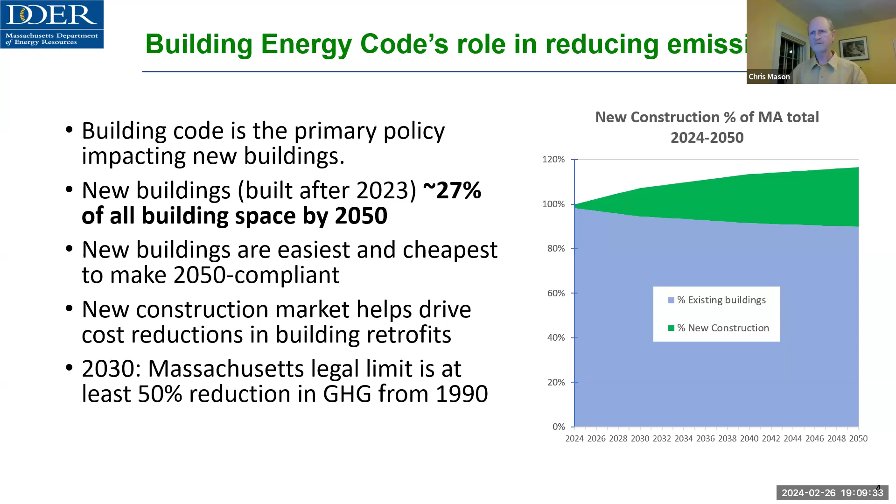On top of that, the stretch energy code, as it increases demand for things such as heat pumps, a rapidly changing technology, makes them more common and more available and more cost effective for even current homes that are going to adopt it. So there's a number of reasons to do this. The primary strategy that the state is using is shifting different kinds of fuels, whether it's transportation fuels or home fuels, from burning fossil fuels on site to an electric model.

And right now you can see that the most efficient way to burn fossil fuels on site is a gas stove, or gas furnace. And to produce 1 million BTUs of heat, it would produce 120 units of greenhouse gas emissions. So right now, with a cold climate electric heat pump, you would produce about 45% less climate emissions. You'd be down to 65. And if you actually got your heat from the ground using a heat pump, you're down to 45. And that's with today's electric grid.

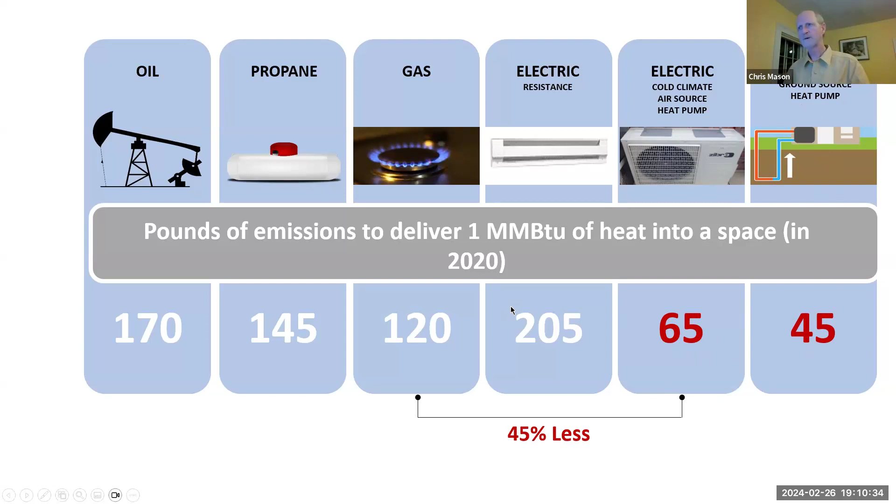So if we jumped to what we want to have happen by 2050, the electric grid, with the houses doing nothing else, their emissions would drop down to 18 units or 13 units with heat pumps. An 85% drop over burning fossil fuels in the house.

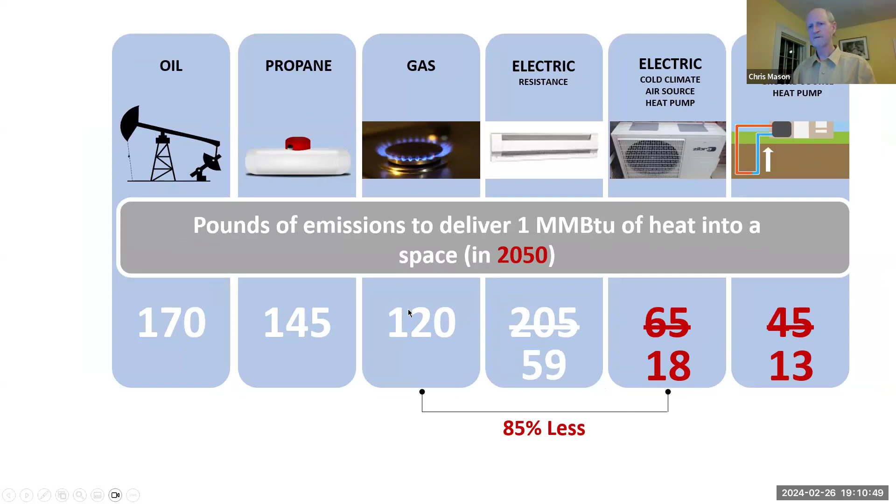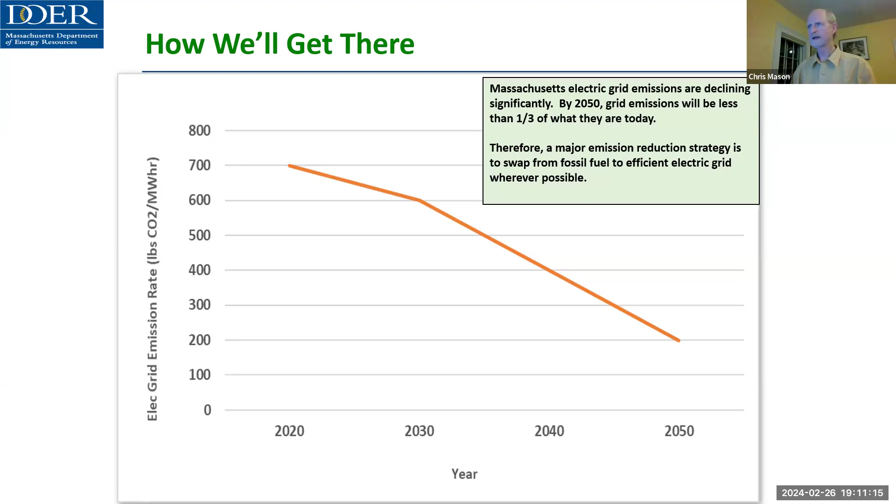So as we're electrifying our transportation systems and electrifying our heating and cooling systems in our houses, the state is working very hard to get our electric grid to be cleaner and cleaner, reduce the number of greenhouse gases coming out of it. There's a chart kind of showing what they're aiming for.

So right now, we're talking about the codes piece. There are 3 codes in Massachusetts, you could say. One is the base code. Everybody really is under the base code. But around 300 communities have adopted the stretch code. So they've got some energy efficiency measures that are above the base code. And then the specialized code, there's 31 communities that have already adopted that. And that's just a few more things that are added on top of the stretch code.

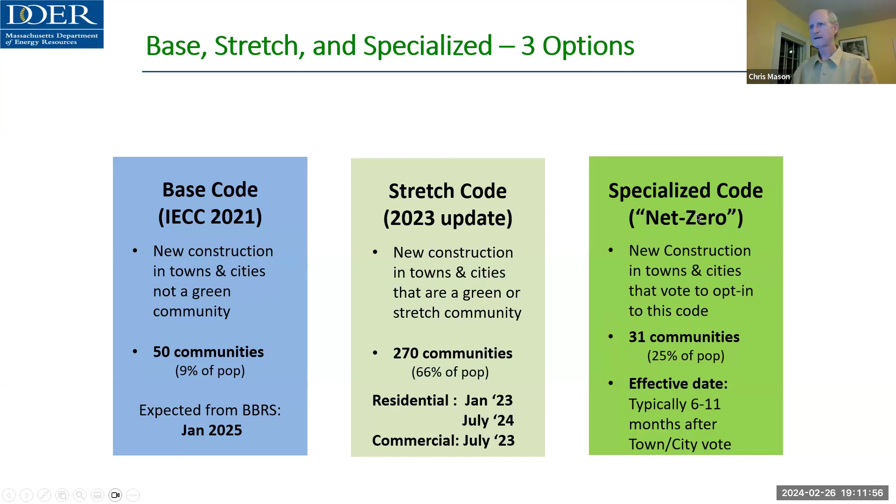Okay, stretch energy code is the current code in Shutesbury, and I'm going to pass this on to Mike Rossi to go over. Now, I want to stress that because a number of changes came out in relatively the same time frame, there's a lot of confusion out there over which code you're talking about, what you are actually living under right now, and what you might be able to vote on at a town meeting. We're going to try to really make that line distinct so you can see it.

So Mike Rossi is going to be talking about the current code. This is what you've already adopted. And then he's going to toss it back to me, and I'm going to go over the little changes that adopting the specialized code would have. We'll run it that way. So Michael. Yes, thanks so much, Chris. So as Chris mentioned, my name is Michael Rossi. I'm an energy code specialist with PSD.

And I want to preface it by saying, the way I like to think about the codes is that you have the base code, and then the stretch code is essentially the base code plus additional efficiency requirements. And then the specialized code is essentially the base code plus the stretch code plus a couple additional measures on top of that. So each of them build off each other. The stretch and the specialized code create a couple provisions that increase the efficiency of the provisions in the code.

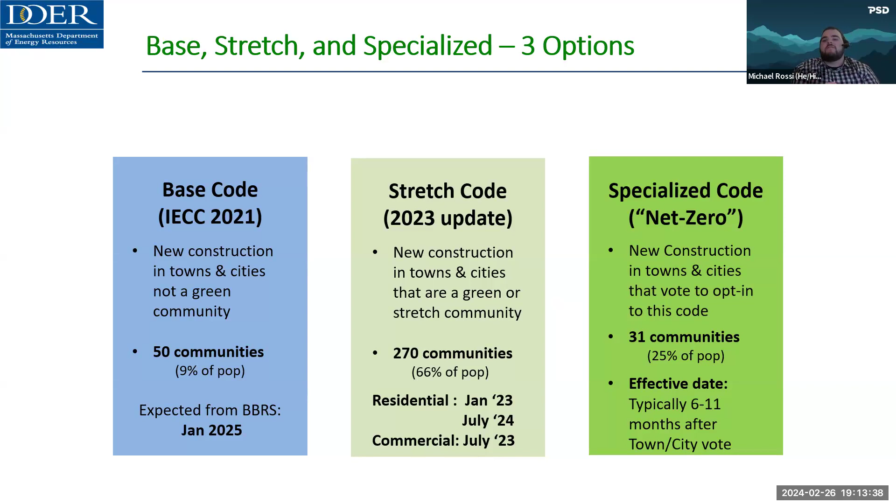So for a little bit of a timeline on what's happening right now with the stretch code. The stretch code in the state took effect for residential buildings on January 1st of 2023. The provisions for the commercial code took effect July 1st of 2023. The requirement initially provided in the residential code was a HERS index of 52, which we'll talk about in more detail in the coming slides. That requirement on July 1st of 2024 is going to be dropping significantly from a HERS 52 to a HERS 42 and 45. The next few slides will explain what that means.

On this timeline, I just want to say that the specialized code became available for adoption on January 1st of 2023 as well. So as of now, as Chris mentioned, 31 communities have adopted it. So it's been available for adoption for a little bit.

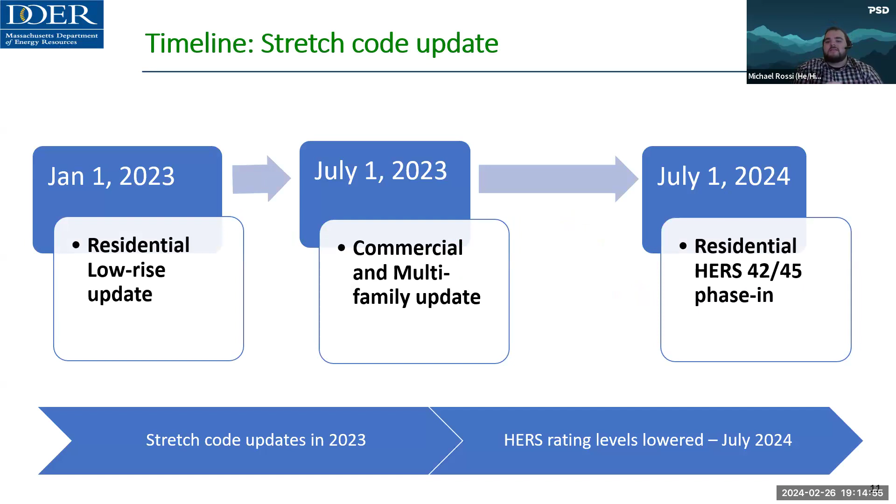All right, so first I'll talk a little bit about what HERS is and the HERS process. A HERS rating is a home energy rating system, which is essentially a third-party inspection that's certified through the Residential Energy Services Network, or RESNET. The way I like to describe a HERS rating is think of it like a miles per gallon sticker for a car, but for a house.

What it involves is preliminary modeling of a home based on plans. The HERS rater is hired by the builder or consultant or someone on site to do some inspections. So first, the builder provides the HERS rater with a set of plans and says, I'm going to build like this.

So the HERS rater takes those plans and builds a preliminary model. And that preliminary model is used to obtain a building permit at the beginning of the construction process. The intent is just to say, based on all of these features that were provided by our client, who's the builder, they say they're going to build with this type of water heater, this efficiency insulation, this level of efficiency, like mechanical equipment, ventilation. They sort of describe how they're going to build the home to the HERS rater, and the HERS rater puts together that preliminary thing that's used for the building permit.

But then part of that is also verifying that the information that was provided at the preliminary inspection was accurate. And what that requires is what's described as a midpoint inspection, where the rater will go in the field after insulation is installed, but before drywall is put on, to make sure that the insulation was installed correctly. And they have different models of how well the insulation is installed. They also collect features about different aspects of the home, like the efficiency of the windows, as I said, the mechanical equipment, the other features in the home. And there's a lot that goes into it.

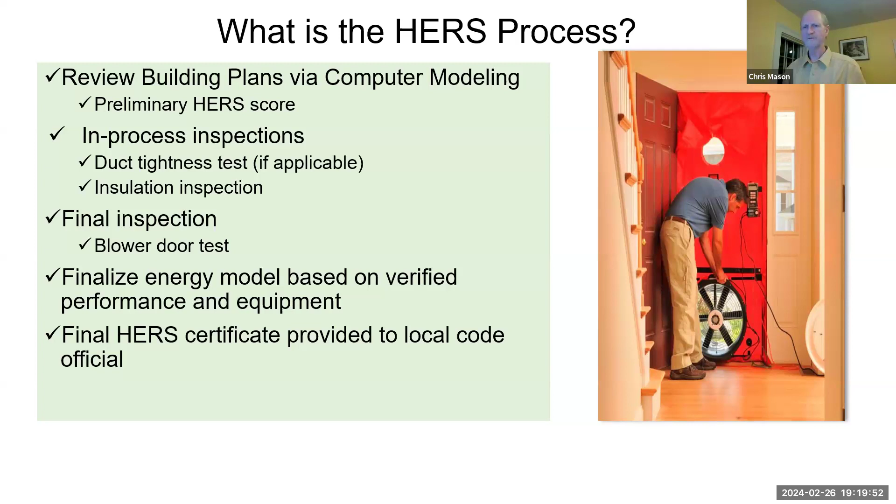And the reason I talk about the HERS process is because it's actually been embedded in the Massachusetts Code for a while now, I believe since 2008 when the stretch code was initially developed. And we'll talk more about what the scores mean in the next slide, I believe. Right. I just want to say, the point you were making at the end there was that not only is the house designed to be energy efficient, it's tested. Correct. So you know it's efficient. You got what you paid for. Yes, absolutely. So the rater is there to ensure that all of the features of the home are done accurately.

So now on the right here, we have that HERS index column, and that's sort of showing what the HERS score means. So the spec home is a HERS 100, and I should preface it by saying the lower the score, the more efficient. The HERS 100 is equivalent to a new home that was constructed in 2006, and the average HERS rating in Massachusetts in 2020 and 2021 was a HERS 51.

Most existing homes fall around the HERS 140 range, just because they're older. They're built prior to 2006, so they're going to have an increase in score. And a zero net energy home would be described as a HERS 0 or below. You could actually also have negative HERS indexes.

So essentially, the requirements of the code have steadily decreased over time. And by decreased, I mean the decrease in HERS rating index, but also increase in efficiency. In 2009, the code was a 65 for the stretch code or a 75 for the base code. In 2020, they were actually the same, with the base code and the stretch code both being a 55. In 2023, the base code stayed at a 55, but the stretch code requirement dropped to a 52, and the specialized code is a 42.

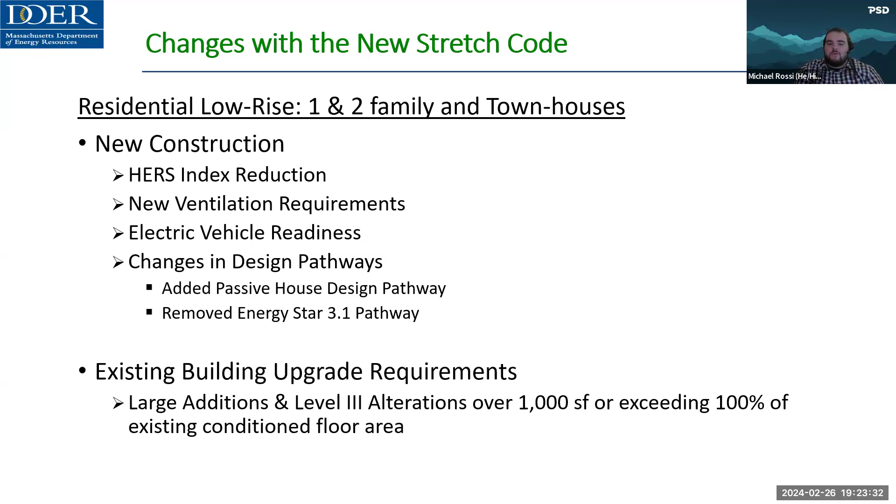And then additionally, there's also requirements for existing building upgrades, where large additions and level 3 alterations over 1,000 square feet or exceeding 100% of the total conditioned floor area also have to follow some of the requirements of the code.

All right, so as I said, I talked about this in a little bit more detail. In January of 2023, the requirement for the HERS index changed from a 55 to a 52. In July of 2024, that HERS index for the stretch code is going to drop to a 45 if the home's all electric, or a 42 if you're using mixed fuels, so if any combustion equipment is used in the home for heating, cooling, water heating, or cooking. There's also EV ready wiring requirements that I discussed, which is one 240 volt, 50 amp circuit per home. And then we talked about the ventilation requirements and the different pathways.

I talked about this a little bit in the last slide, but for large additions and alterations, the HERS requirement for additions is going to be in the range of a 52 to a 58, depending on the sources of energy that are used in the home. And the existing buildings that are required to use a HERS rating are those that exceed 1,000 square feet of an addition or where 100% of the existing conditioned floor area, which is intentionally heated space, is altered.

All right, next slide, please. Gail, do you have a clarification question? Yes, it seems odd in July 2024 that the HERS is 45 for all electric and more efficient for mixed fuel. Can you explain that, please?

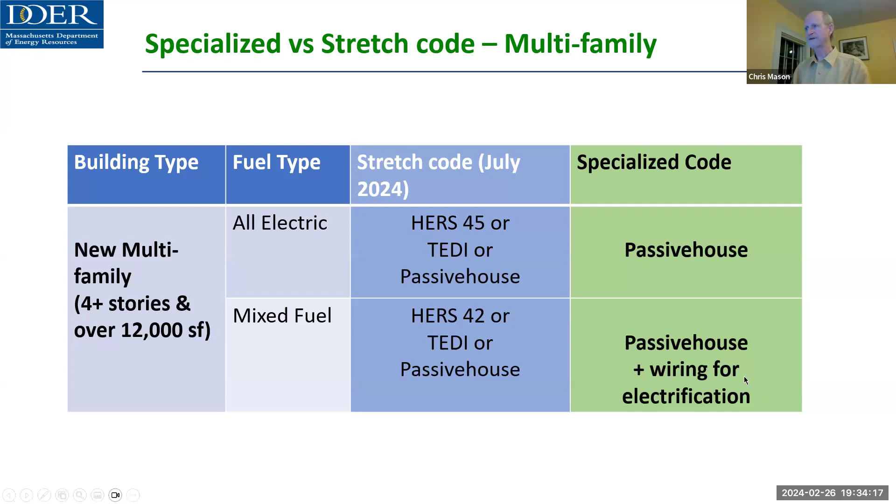You guys asked us to stick mostly with residential because I think that's what Shutesbury is predominantly concerned about. But you did say to touch upon commercial and multifamily. So that's what I'm doing right here. So multifamily, the specialized code basically narrows the pathway for an all-electric house. So you have to go from what's known as a TEDI, which I won't get into unless you're really interested in commercial, or HERS 45, so it narrows you down to the Passive House pathway. And then once again, with mixed fuel, it adds in wiring for electrification. That's the only change.

For commercial buildings, again, if it's all electric, the requirements stay the same. Specialized code doesn't affect anything. For mixed fuel, once again, you have to have the solar PV and wiring for electrification. And for other commercial, that was schools, office, municipal buildings, it's basically the same thing. If it's all electric, there's really no change. Mixed fuel, you have to add solar and wiring for electrification. So a little bit on the specialized code adoption process and timeline, which we can come back to if you want. It's in the slide deck. And I think I'm going to pass it back to Mike for the general frequently asked questions and to wrap up.

Yeah, for sure. Thanks, Chris. So here are some frequently asked questions we typically get about the code. I'll just run through them really quickly. So does the opt-in specialized code apply to existing structures? The answer is no. Improvements to existing structures, depending on size, are regulated by the updated stretch code and the base code. The next question is, will the opt-in specialized code discourage the creation of affordable housing?

The answer is no. Also, the incentives will continue to encourage affordable housing, while the opt-in specialized code delivers benefits to the residents. And another question we get a lot is, is it possible to install a gas cooktop? And the answer is yes, and that's permitted under the mixed fuel pathway.

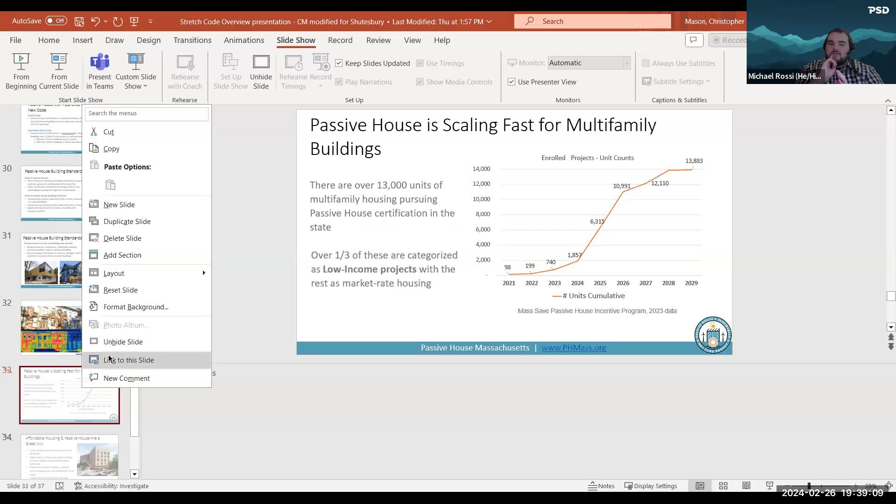Passive House is also a third-party certification program similar to HERS, but there's two options. There's PHIUS, formerly known as the Passive House Institute United States, which is the US model for Passive House design. The requirement for that path is achieving a PHIUS CORE 2021 certification or a PHIUS ZERO 2021 certification. And I love this picture too, and I'll talk about that in a sec. Can you see this?

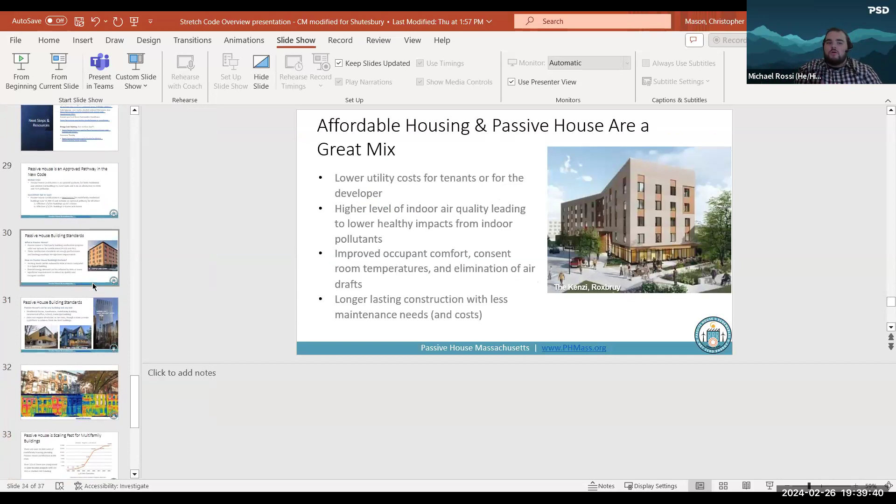Okay, yes, thanks, Chris. So the other certification type out there is PHI, Passive House Institute, which is the European standard. So you can either use the US standard or the European standard. And you just have to have a third-party verifier, similar to a HERS rater but more of a passive house consultant, to rate the home to determine if it meets the requirements of the passive house project.

So as the slide shows, passive house is an approved pathway in the new code. In the stretch code, it's an optional pathway for both residential and commercial buildings and is an alternative to the HERS or TEDI pathways. As Chris said, TEDI is really complicated. It stands for thermal energy demand intensity.

It essentially sets limits for commercial buildings for what you have to meet for a heating load and a cooling load. But it really takes an engineer or an in-the-weeds design professional to really get what the TEDI requirements are. So typically we're not going to dive into that in too much detail.

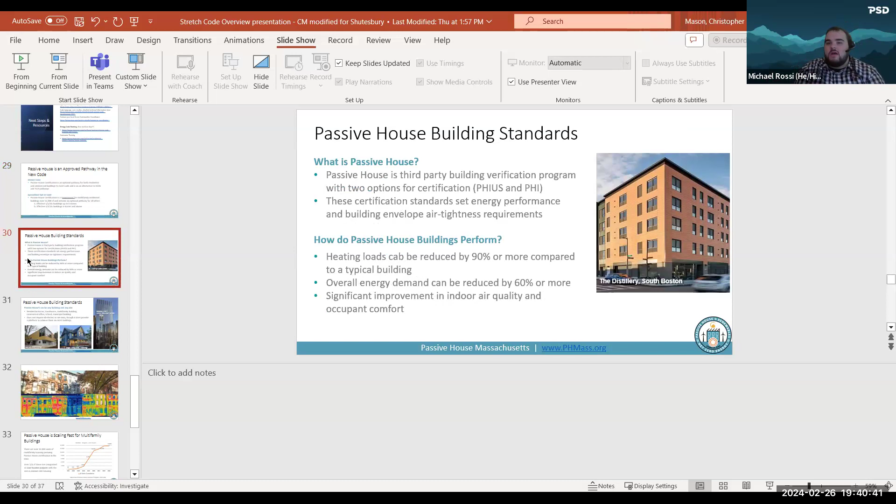And the other thing with Passive House is, as noted with the opt-in code, it's also a requirement for multifamily residential buildings over 12,000 square feet, and is an optional compliance pathway for other types of buildings. As you can see here, passive house buildings can be any building of any size: residential buildings, townhouses, multifamily buildings. It doesn't require all electric or net zero, but it does provide a pathway to get there.

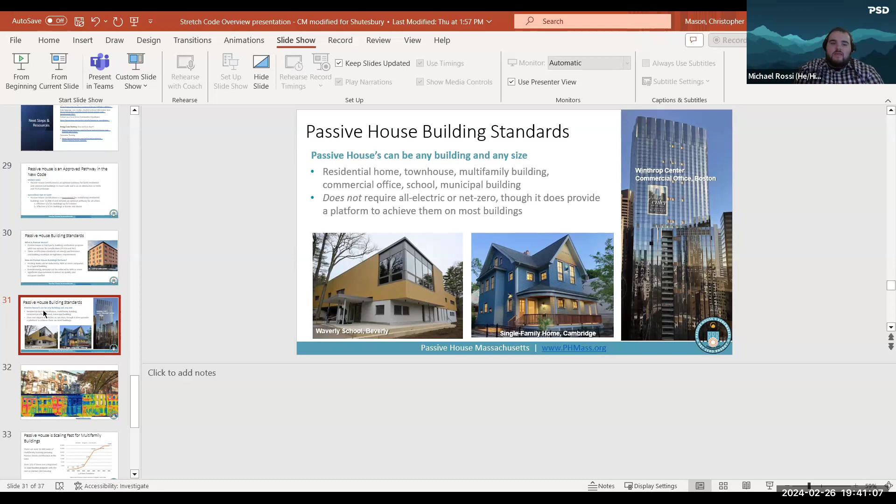So yeah, passive house, even though it says house, it does apply to all different types. And then if you go to the next slide, please, Chris.

Yeah, so I really like this picture because it really shows the thermal energy usage of this row of townhouses right here, with the thermal camera. So the passive house is the one that's shown that stands out in blue. And the reason being is because there's a lot less energy that's being leaked out of the house compared to the adjacent units. So the passive house is a lot more airtight, so you're not going to see as much energy going through the building envelope. And by having less energy go through, it's going to be more efficient.

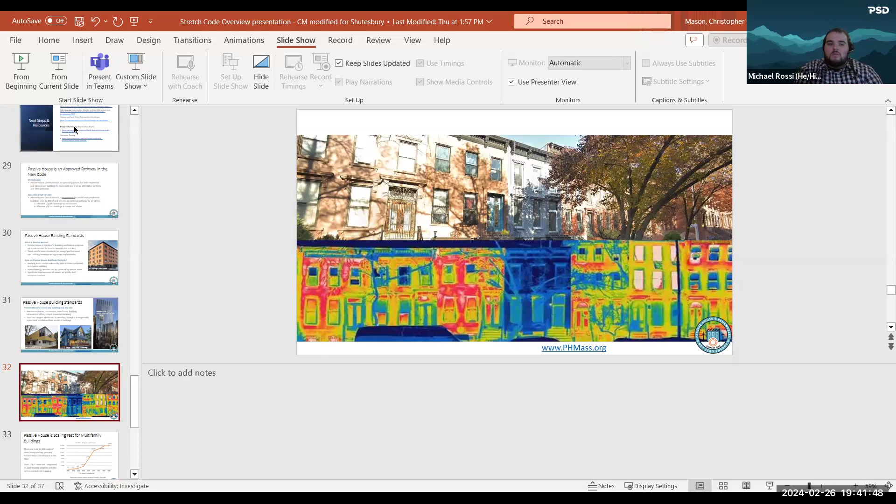All right, so I think that's all we can cover there, just to give a little bit update there. But yeah, so now I guess we'll open it up to questions, and I'll turn it back to Chris or Michael. Thank you. Well, I think before we wrap up, Chris, if you just want to go over the process slide that you showed, because I think that might give some context. Sure. Whether or not we go there, it'd be good to have some information.

Is this large enough for people to see? If you can make it bigger, that'd be great. Let me click on... give me a moment then. Okay. And if not, that's fine, the other way. Yeah, I'm hoping this won't take that long. I'm actually kind of baffled at what happened here when I got to the end. Then you just have to go into the slide presentation mode, and then it'll get bigger. Well, I have it on my screen as, here we go. Is that better? Yes, perfect. Ta-da! Yay. Okay.

Right, okay, so it needs to be put on a warrant article and be voted on by town meeting. It's a town meeting bylaw. You know, just like any other bylaw, published in state register, I guess. In this case, town meeting votes. And you set in the bylaw the effective date that you want. It's up to you, but DOER highly recommends that you give it at least 6 months. So there's a 6-month window before it goes into effect.

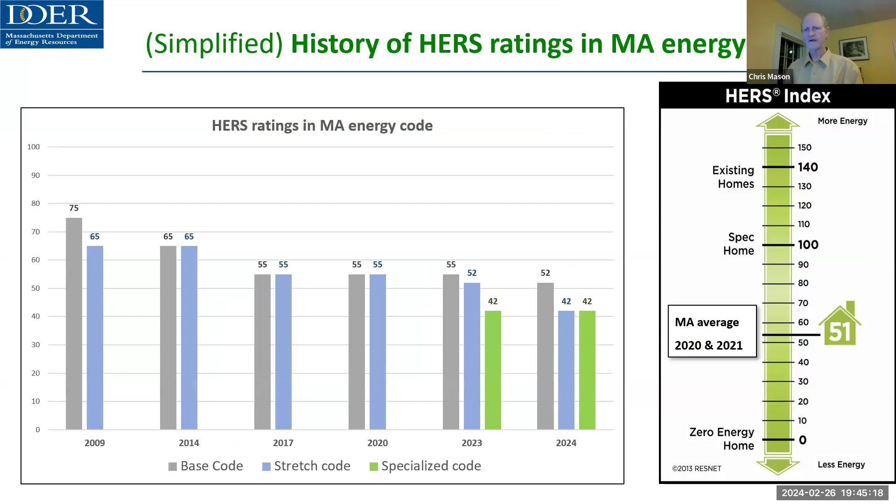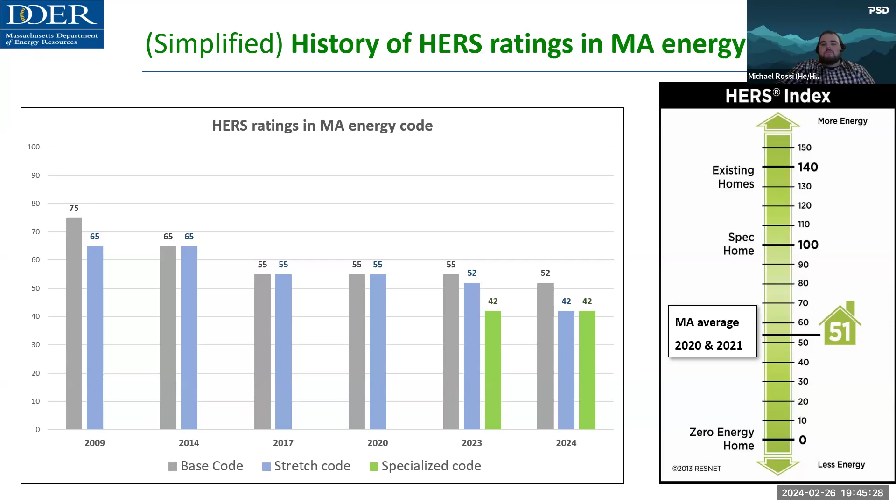So the specialized code would still have the requirements for pre-wiring for electrification, and the requirements for the photovoltaics, for the solar electric. Other than that, they would basically be the same at that point. Whereas if you were under just the stretch code, you don't have those added requirements, even though the HERS rating is still the same. That's correct. Yep. So essentially it's adding what Chris said. He covered that really well. Great. So I'm wondering, Mark or Craig or Melissa, do you all have any questions you want to ask?

Oh, Mark, you got a question? No, I'm just saying it's quite a very interesting presentation.

Thank you. Melissa? Yeah, I have a question to ask, and you can correct me if it doesn't quite apply here. I live in a very tight house. It was built in 1998. Probably would have a very low HERS score. And I've been told by many furnace people that my house is too tight and unhealthy because it doesn't leak enough. And we essentially have to leave a window open to let the passive air come in.

How do these regulations help with keeping a house healthy? Because you do have to have a passive influx of air into it. Yeah, I'm happy to speak to that a bit. So I think there is a myth out there that we're building houses too tight, and that the house needs to breathe. But the way I've heard it said is that the house doesn't need to breathe, the occupant does. And what that means is that the ventilation system that you have in a tight house like that has to be enough in order to meet it.

So building science is pretty complicated, but part of it is that every aspect of the home has to connect to another part of it. Right. So if the building's too tight, but you don't have a properly functioning mechanical ventilation system, then you might have some of these mold and mildew issues that develop because of condensation. Because if you have an airtight house with improper ventilation, that might not help with it.

So the way I like to describe it is that the code requirement here is to have this ERV or HRV available that provides balanced ventilation, meaning the amount of air that's brought into the house is similar to the amount of air that's exhausted out of the house. And that provides a pretty good mechanical ventilation system that can help improve indoor air quality that might be associated with that tight envelope. So it's all about working together. The mechanical ventilation system has to work together with the envelope in order to achieve the best results.

Thanks. Melissa, I would add to that one of the downsides of a house that you would call leaky is that the air moves through the house wherever it can find a pathway. It's not a controlled pathway. And when humid air moves through a house, it often will condense. And so you can find parts of the house where, as the air is moving through, it actually causes moisture buildup, which could then cause mold and other irritants and degrade your air quality.

Whereas if in this case heat or energy recovery ventilation is required, then as Michael said, you're moving air out, and when the air comes in, you're actually going to take the heat out of the air that's going out, and put it in the air coming in. So you don't have the energy loss of having air moving through your house, because you're actually grabbing the energy, but you are sizing the ventilation system to provide you with plenty of good fresh air.

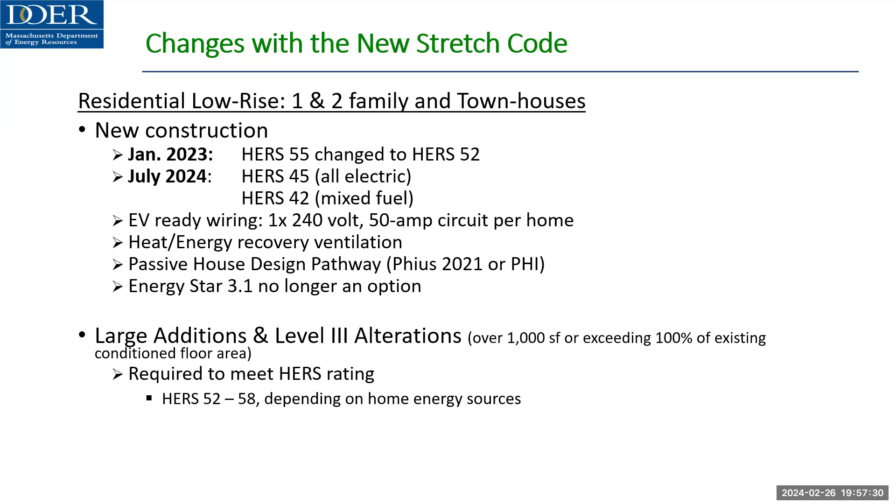You're asking people to put things in their house that add cost to that construction, and that is a concern for some people. If you're a contractor and you're building a house and you want to make it sellable, these are great. But if you're on a somewhat fixed income, you have only so much you can afford to put into a house, and you're going to build that house to what you can afford, this may throw those into adding more than they would like. So I guess it's both really, Michael.

Now, this is also asking people to put stuff in their house for the next person who might want it, and they may not want that in their house, to be honest. It does force them to do something they may not want to do. I live in a very efficient house that was built in 1998. My electric bill tells me my house is more efficient than my neighbors', and my neighbors have solar panels and I don't. So it can be done without some of this stuff. That's my concern: people being forced to put extra things in the house that they can't necessarily afford, especially with the cost of building now and inflation. Thank you.

Yeah, thanks for that question. I do think it has merit and value for sure. When it comes to additions, it is only over a certain percentage that you have to do a HERS rating. So it's only if it's over 1,000 square feet, or if you're adding over 100% of the existing building area. Those are what we'd consider the larger additions. If it's a smaller addition, 999 square feet or below, it's able to meet a prescriptive code requirement.

And what they mean by that is, structurally sound, it can hold a PV array. And you need to have identified a chase that you can run wires through at some point. So it's not that much, it's really not a lot. Well, that's what the cost would be if you're going for the specialized code. And the size of the code, the size of the house, it's the size of the PV array that it's asking you to meet. So 4 kilowatts or probably around 8 kilowatts plus, depending on the size of the house.